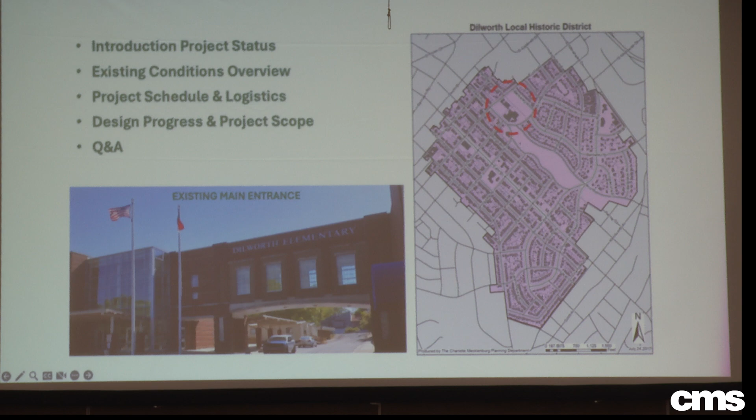So we're just going to give you an idea of what we're going to cover tonight. First, we'll introduce the project in terms of where we're at, a little overview, starting with existing conditions in terms of the overall campus, talk a little bit about schedule and logistics when it comes to construction, and then provide a design update in terms of the repurposing and renovation of the school, and then have an opportunity for question and answer.

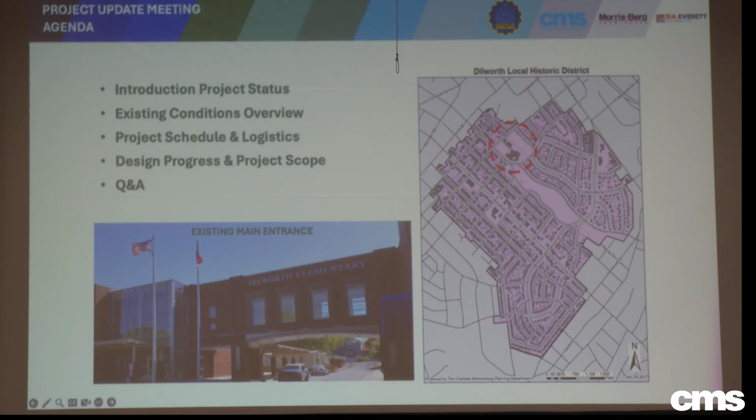So just really quickly, as far as high-level project status, we're about 50% of the way through what we call design development right now. So we're still working on the documents in terms of design and working through details associated with the design with CMS.

We've been at it for several months now doing that, and while we're doing that, we also have with us our CM partners here from DA Everett, the construction managers, and they've been busy working behind the scenes doing surveying of the school, utility investigations, helping us out, cost estimating, things like that, so that we can hit the ground running in the summer of 2026 with construction.

Also not with us here are a host of other people, engineers that support what we do. Actually sitting right here is our civil engineer on the project, Brian Crutchfield from Timmons Group. I don't see anyone else on our design team here. Oh yeah, Kirsten from Stewart Engineering, so our structural engineering team. So that's nice to see.

So obviously this is where we're at. The Dilworth Elementary School is right in the heart of the historic district, so that presents some unique challenges in itself, but challenges that we're starting to embrace as we engage more and more with the Historic District Commission and with the community.

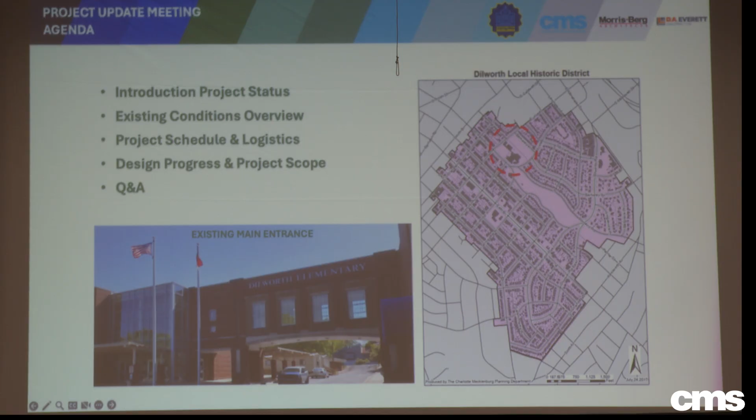Let me go forward here. Testing. Okay, so Alexandra is just going to give us a little bit of overview of the existing conditions. So this is a very quick overview. Obviously this is a very rich campus that's very rich in history. It's also situated in a nice wooded environment that we're so lucky and excited to be working on.

Technically, the campus is just one building that we're in right now. It's just a long one, but for the purposes of this project and this presentation, we've identified 3 buildings in the sequence in which they were built. So, starting from the left, you'll look at Building A. This one's typically called the Euclid building because it's along Euclid Ave. This is our oldest building on site, a historic building that was built in 1904.

Following that, we go to the right, to building B. This one is further divided into building B1 and B2. B1 is where we're at right now, and it includes our dining, nutrition, and administration, and most of our classrooms. Attached to this one is B2. This is a later addition from 1991, and this one includes our media center.

Tying the two buildings together, we have building C, and that is where we have our gym space. This site is very interesting in the sense that CMS has a joint use agreement with Parks and Rec. So on the first floor of building C, you'll have the Tom Sykes Recreation Center, and then the second floor is where you have the gym. Surrounding the building, you have the soccer fields above, tennis courts below, and then overflow parking.

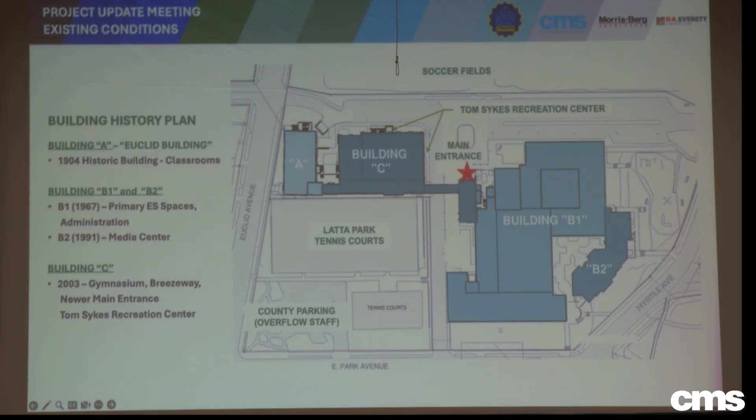Zooming out a little bit more, you'll see the full site. So the red line is our site, our parcel. What we want to focus on here is the circulation on the site.

With the green line here, you will see how parents walk into the site. This is where we have our queuing line for parents drop off and pick up. They come in through Myrtle Ave, and they get dropped off usually where the star is, which is our main entrance at the moment. Our buses come in from the south, from East Park Avenue, and take a left into Euclid Ave. Again, kids are dropped off in the center of the campus. So the center of the campus is where the main entrance is and a lot of this activity is happening, this activity node. So it's not necessarily super visible from our points of entry on the street right now.

And a lot happens here in the mornings and the evenings. Parking is fairly limited, so our visitors or staff park right here on the north below the soccer fields, with some overflow parking for staff and visitors below the tennis courts. I believe that's it.

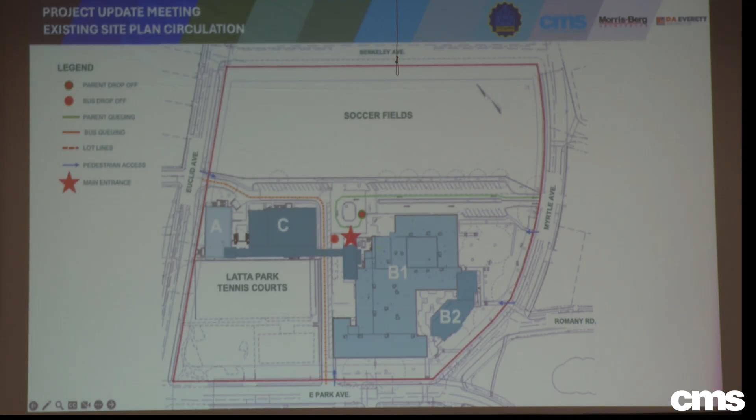This is zooming in a little bit more now.

Now we're looking at how the building is being used currently. Note the colors, they will change later on. But this is our elementary program, so a couple things to note here.

If you look at Building C, in the middle, first floor, the red crosshatched area is the Parks and Rec suite. We are not touching that, that's still gonna be there. But the white space in that building is currently unoccupied space that we are proposing to reuse when we turn this into a middle school.

All of our classrooms are the orange, like you see. Again, our entrance is right here in the middle of the campus. And something to note here is our administration currently is located here in building B1.

Another thing to note is we have a stage here next to our nutrition cafeteria space, which is right there. But we also have a second stage next to the gym. So there's a little bit of consolidation that will hopefully take place when this turns into a middle school.

The rest is pretty straightforward. One of the challenges we've been facing, but it's also a really nice puzzle, is fitting a middle school program inside of this existing building footprint.

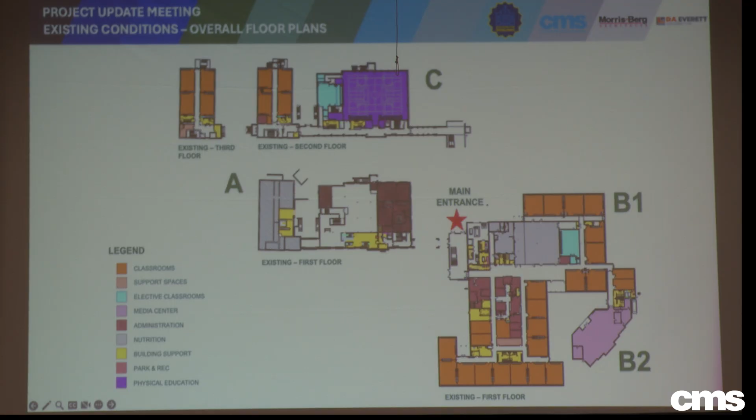All right, so that gives us an overview, basically a starting point of where we're at now in terms of the circulation and the floor plans.

We have a process coming up here in the next couple of weeks with the historic district, and then after that we'll have to go through some others with Mecklenburg County. Then we'll hand it off to our CM, who for a few months will work on the bidding and contracts portion of the project.

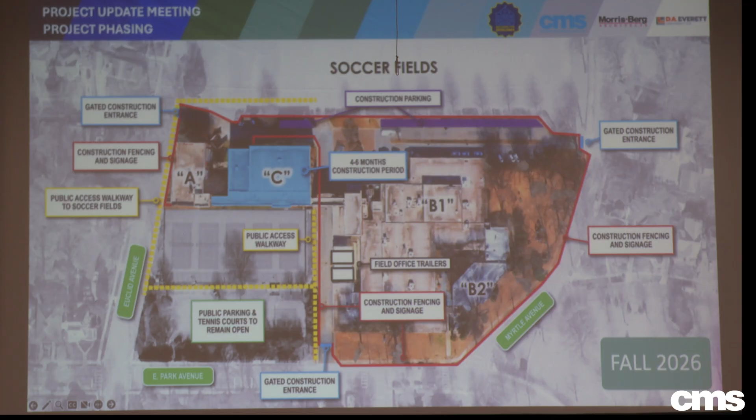Since we are going to eventually touch every portion of the school, whether it's through utility renovation, finishes, or codes, it might not be that we're touching every wall, but at some point every portion of the school is going to have to be touched for one reason or another, including the existing gymnasium and that recreation center area. So the work that takes place in there may be about a 4 to 6 month period of time.

That doesn't mean that the rec center will be closed for that period of time. More details will come as the schedule develops, but there'll definitely be some limited access for a period of time when we have to get in there and do some work. During that time, this area will remain open, but access to the building will be closed at that point.

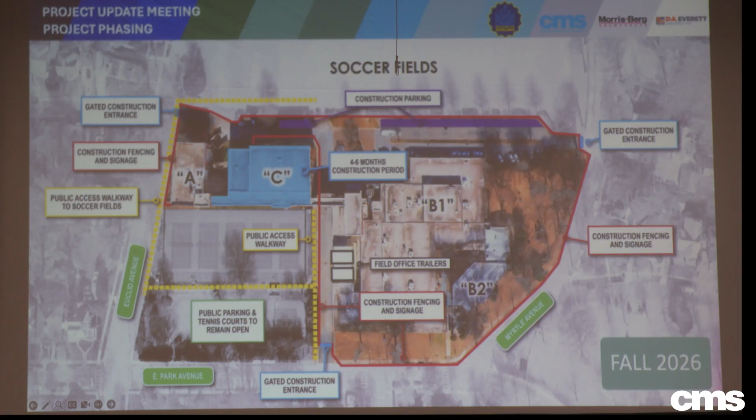Okay, so what are the changes here? We just went over the existing layout and how the traffic and circulation goes through. One of our subtle but most impactful changes will be moving what that main entrance location is going to be.

In terms of buses, the traffic pattern remains relatively the same. I think we can fit a little bit more, but we are going to again go in through East Park Ave and then take a left onto Euclid.

Students coming from buses will drop off in the same location, but parent drop-off students will go into the main entrance, and we'll talk about that more. Our pedestrian access remains intact, and we're not going to touch the soccer fields or tennis fields, so all of that and the parking will remain as is.

So while it's a subtle change, one of the biggest changes here is the fact that we're separating the drop-off here, creating a little less activity right in this central area. The other thing is that by getting the entrance closer to this corner of the school, it allows for better recognition of the school entrance, better security from that perspective. As Alexandra mentioned earlier, we'll talk about that in a second, and another floor plan change that is driving the relocation of the entrance and also improving security when it comes to the floor plan.

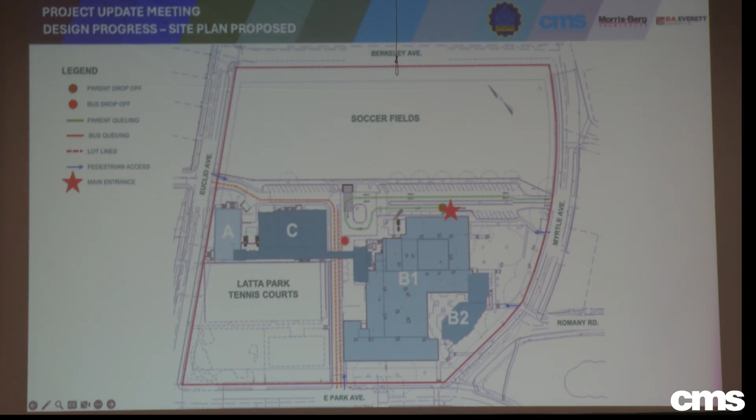Zooming in more, now we're looking at what this proposed floor plan is going to look like. Sorry, we'll do questions at the end.

So one of the main things, like we talked about, is the main entrance moving to this corner now. Like Tom mentioned, this is going to create more visibility from the street, the point of entry. It's also going to bring that entrance vestibule up to the current CMS standard, so we're going to be aligned with that.

One of the other things we're doing on site here is we are moving our trash enclosure more toward the center of the campus to better serve our new renovated kitchen area. And then last but not least, we're also going to remove these two mobile classrooms that are on site currently. This will give us the opportunity to have more outdoor space, and potentially some outdoor classrooms for some of these classrooms proposed for this area, and natural light as well.

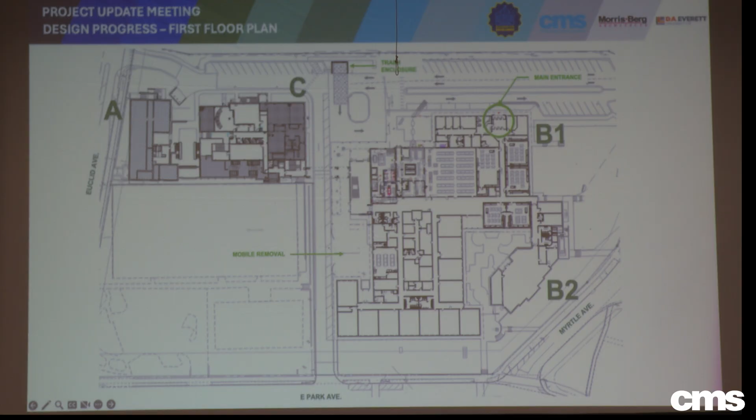And this is, again, zooming in just a little bit more on that circulation pattern. As we mentioned earlier, they are subtle changes, moving the entrance here, and also some changes in the site work, creating a little bit of a plaza here, some additional signage, again, to do our best to identify this as an entrance.

Unfortunately, changing the building envelope is not an option, and in the historic district, doing something like was done back here in 2003 with a grand two-story entrance is just not in the cards right now. So we're doing what we can, whatever the budget and the historic district will allow us to do, in order to make that as identifiable as possible.

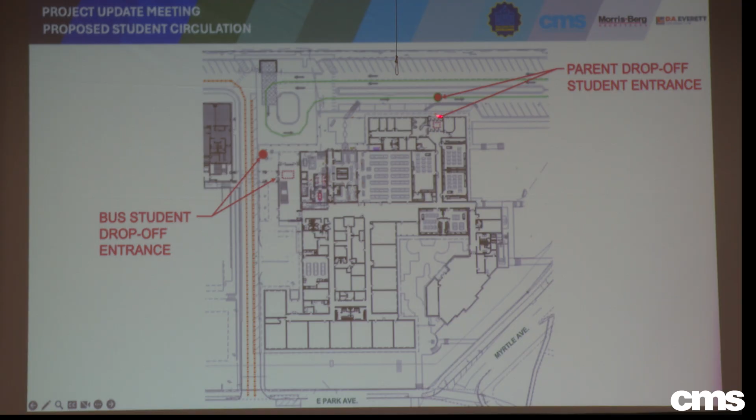The other thing we're identifying here again is the fact that we're separating those drop-off points so that we have controlled access for bus riders and then for parent drop-off, and that's associated with a new secure vestibule and the new admin area here.

Obviously, since we're working within the envelope of the existing building, we're not building a full baseline CMS middle school. We're doing what we can to fit as much of that program into this school. So our total classroom count here, along with electives, is 30, whereas in that baseline school the total number of classrooms is 45. And the reason I bring that up is because it ties into some of the other things we're doing as we move forward, for example, this space here that we're in.

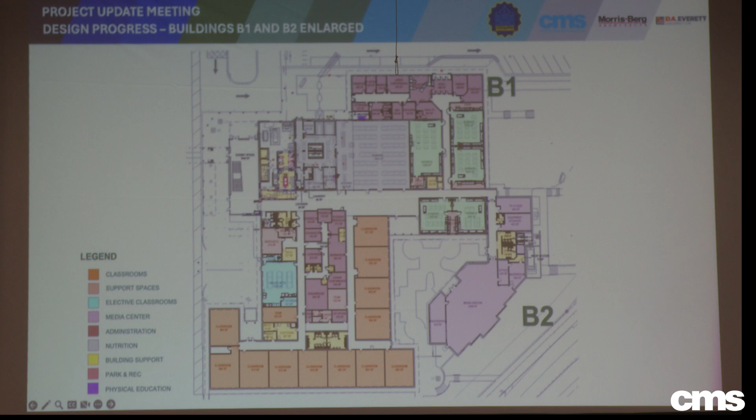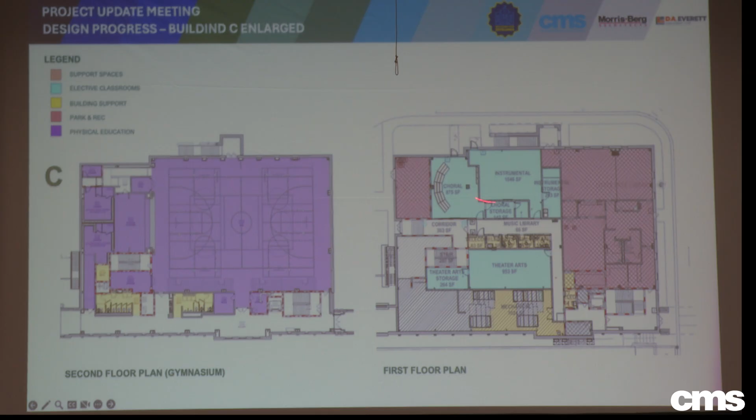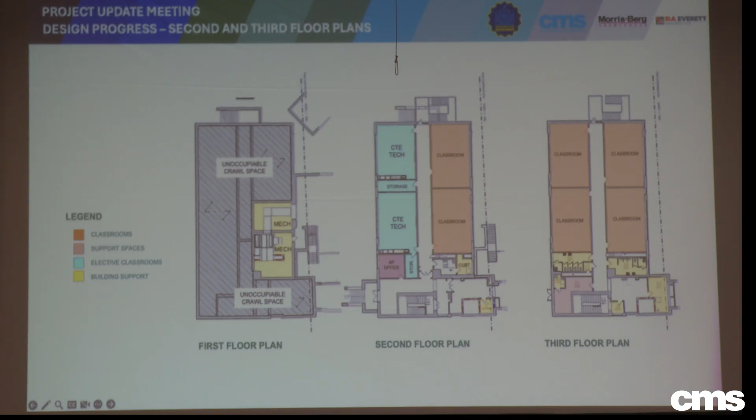So this is our overall floor plan. Coming back to overall modernization, for the most part throughout the entire school, wherever we're touching a space and wherever the budget allows, we'll also be improving finishes. All of the lighting throughout the school will be modernized, new roofs, group toilets will all be renovated and made accessible, and we have some new group toilets, new staff toilets, new HVAC systems. So pretty much a complete refresh and modernization to improve the overall learning environment and teaching environment.